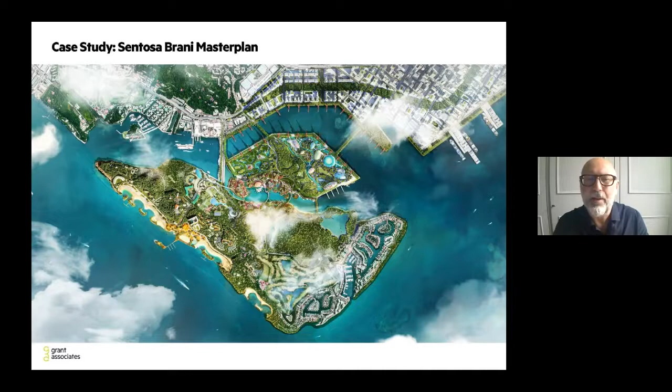Similarly, in Singapore, a few years ago, we worked on the Sentosa Brani master plan, where as landscape architects we led the project looking at how do we replan the 600 hectares of prime Singapore estate, the old port area, and Sentosa, the main leisure environment. Lots of themes about greening and urban, coastal protection, all the sort of environmental stories that we're talking about was brought to bear on that.

And it was great to see how the team came together, with Arup, the engineering playing a particularly important part, working with ecologists, working with economists, working with people who are specialists in the various aspects of the economy of the project.

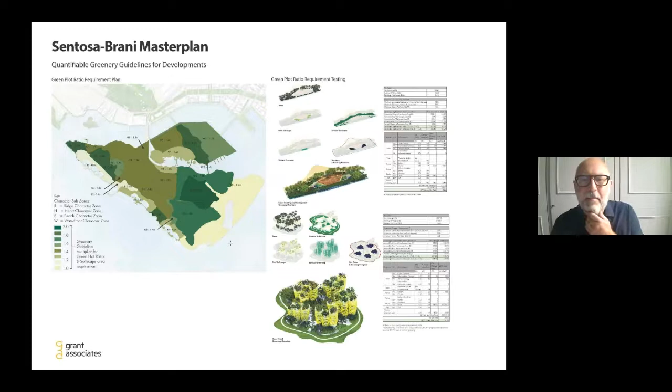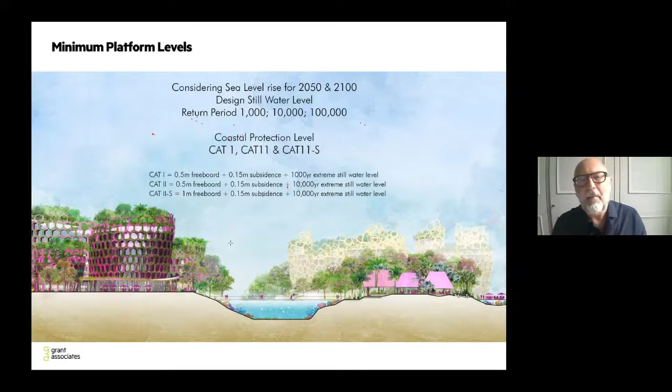But ultimately, it made us respond to some of these big environmental challenges in terms of how do these sensitive areas respond to sea level rise predicted over the next 50, 100 years. How do we retune the perimeters of these extraordinary places to be more resilient to those sort of changes? How do we recapture and restore coral reefs, seagrass, birds, beaches, all these aspects that are so common to challenges around Asia?

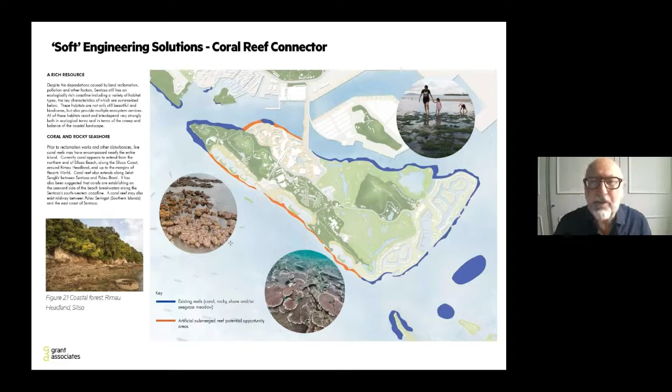It makes you think differently about the systems - understanding the systems we're involved with, the relationships, the circular economy, all those slightly abstract aspects really come into focus when you start to think about these new land use planning challenges, these new economic challenges. How does that work with the built environment and what we do?

At a smaller level in Singapore, there's the rooftop farm on Funan Mall, which is a great little example of a micro system that sat right in the heart of Singapore, in the busiest part of the city.

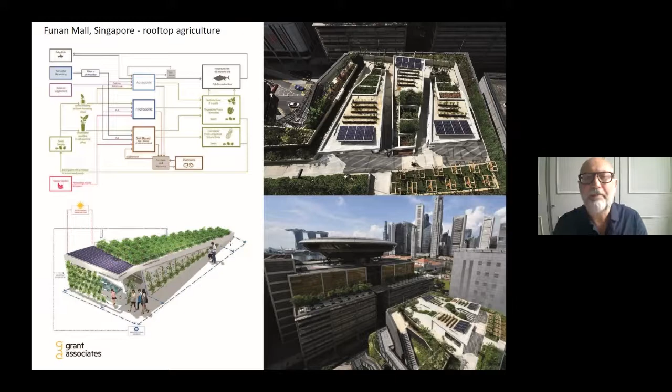As designers, we can be influential in different ways. This was a garden we did at Chelsea Flower Show in 2020, representing the ecologies of Guangzhou - a small garden, 20 meters by 10 meters, representing the environmental systems the Guangzhou government are trying to implement: the water networks, the lungs with the trees, and the kidneys with the water systems. We can showcase that to a very large number of people - Chelsea Flower Show was seen by millions, whether live or through broadcast. So we can influence people in different ways.

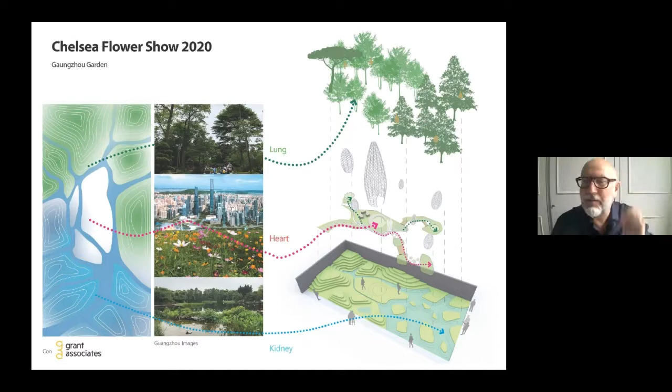So biodiversity is brought right into the heart of the city, hopefully incredibly influential, creating a much more intimate relationship between people and biodiversity, which I think is a fundamental part of any approach to climate and built development going forward. So I'll close there. Thank you very much.

Thanks very much, Andrew. It's really interesting that you played into some of the themes from last week - Dr. Hussain in particular was talking about how we have to consider ourselves as part of the great scheme of nature and not treat nature as a resource. I'm sure there'll be plenty of questions at the end.

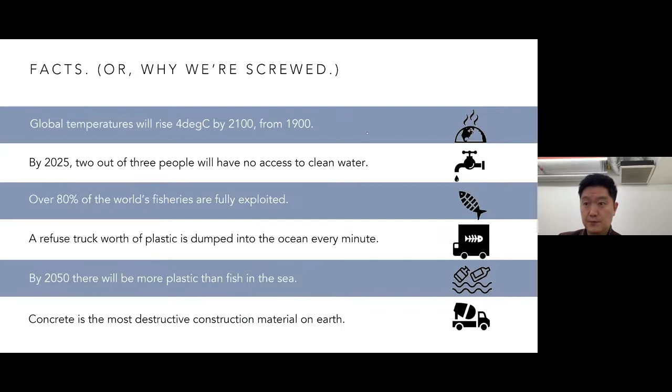To be honest, I think there are many goals within that architects do not have the agency to influence or control. For instance, gender equality - we might have more balanced workspaces, but the truth is we're not going to do too much yet in terms of solving, say, the hunger issue, the gender issue, or maybe even good jobs and economic growth, because we are, after all, guardians of the built environment.

We'll start off with the first, and that's education and integration. We look at modes of writing project briefs, for instance, writing project guides before the project even begins, and basically talking to the developer to set some of these sustainability goals. This could include forced or coerced modes of integration, including BIM integrated models that become part of the deliverable requirements for the project.

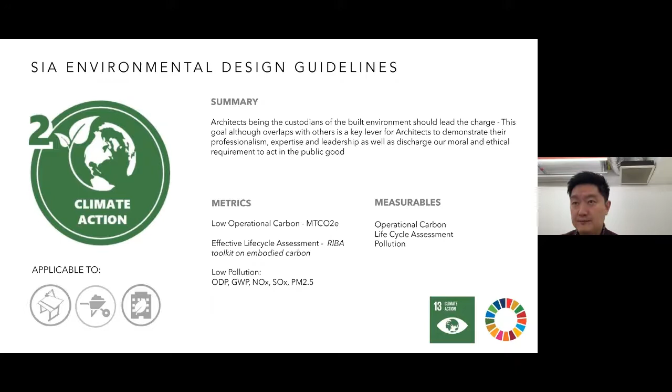So how do we set forth some of these goals? That could be in the example of a master planning type of project, indicating the required water savings, indicating the required environmental impact assessments, and limiting the damage to the existing ecosystems. Next slide.

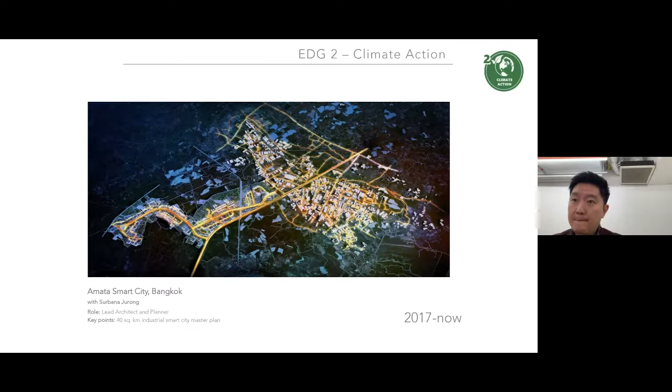And when we're actually talking about designing the building forms, they would of course need to maintain certain aspect ratios. They would need to incorporate as many renewables and clean energy tools as you possibly can. And these could be also targeting towards a preset energy requirement or an energy savings requirement that you set for a particular precinct. Next slide.

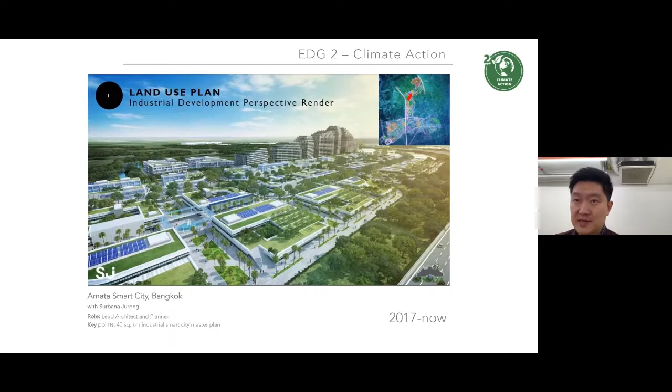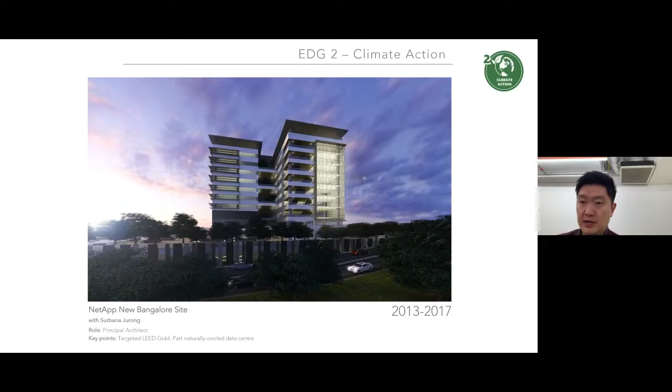Here's an example of a project in Bangalore, India, which actually has a cooler temperature than most of the rest of India. So it makes use of the ambient temperature of about 23 to 24 degrees Celsius on a good day, using that to cool the data center as opposed to using electrical cooling.

The next EDG would be on natural capital, basically preserving as much nature as possible. Andrew's covered pretty much all of that already, but effectively the metrics could include biodiversity indices, depending on where you are and which types of biodiversity are specific to your climate and context. A green plot ratio, or GNPR, looks at how much green you're actually replacing and how you carry that green, for example in vertical greens. The measurables could include leaf area index, landscape replacement, and how many species of biodiversity have been reintroduced as a result of the building.

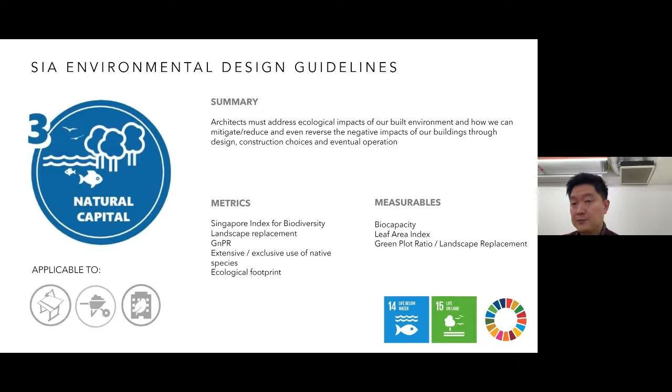Resource management—I'll spend a bit more time on this because there's an increasing shift now towards the discussion of embodied carbon and what we're going to do with waste material. Some of the metrics could include, for example, a percentage replacement of energy with renewable energy, as well as materials that have previously been recycled or are recyclable downstream at the end of their life cycle.

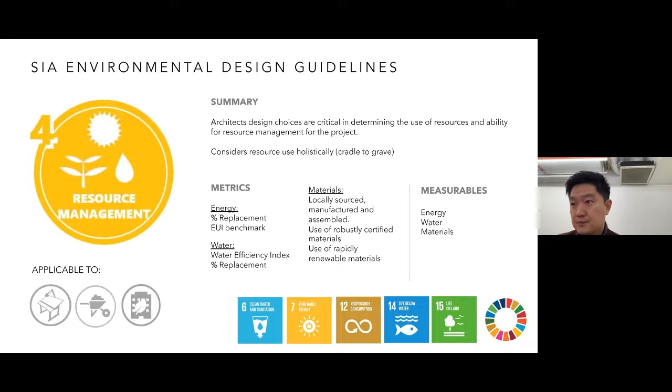So there's an example of a project that makes use of recycled materials, although it looks fairly constructed out of virgin material. This is a project that makes use of 1.5 million water bottles that has had its PET recycled into building blocks.

These blocks constitute the facade bricks as well as the interior lighting bricks, and you can see how they interlock in one of the images.

Each of these bricks is about the size of a small jerry can, and basically they can interlock and tessellate, therefore trapping air for insulation. Where you find any leaks or potential areas of leakage, you could also seal that up with resin.

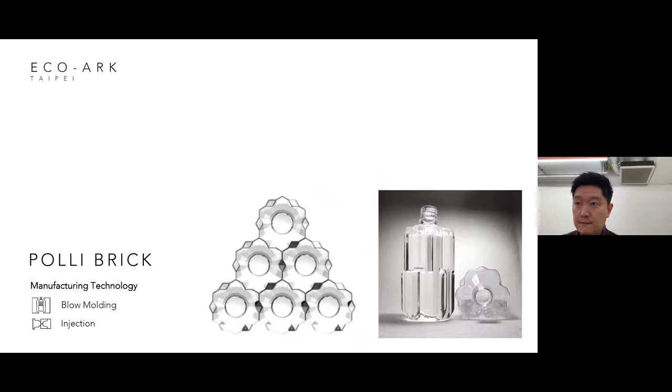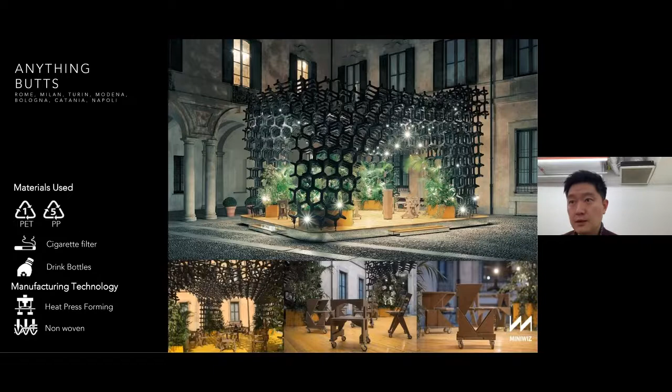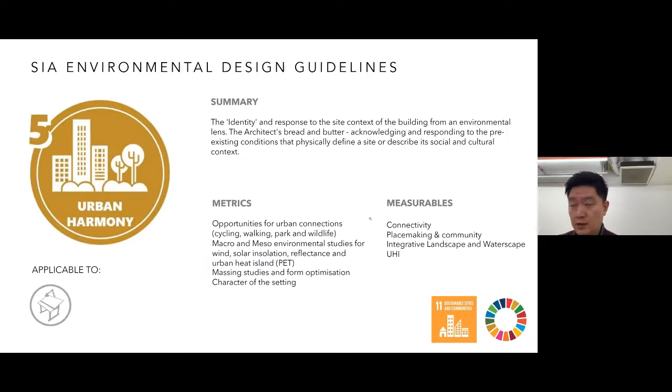An example from way early on in my career, a public housing building. It looks not so harmonious yet, but at this point in time the entire landscape has basically densified, and this becomes part of the urban tapestry of a public housing zone in Singapore, introducing breathing lungs within the building through the voids, and opportunities for chance encounters through connections at regular intervals within the building. Just a bit of context, we don't talk to our neighbors in Singapore. We go home to our little pigeonholes, and with any luck we'll be talking to them through Teams or Zoom.

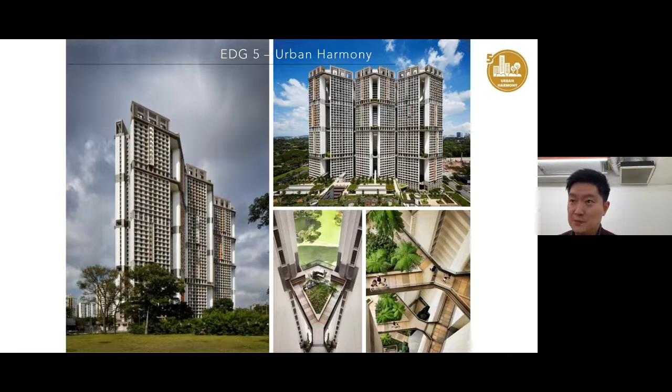Health and well-being. Here's where we adopt the principles of biophilia, of comfort, of safety, and of generally creating pleasant environments, designing gates and fairly social environments while keeping security in hand. Some of the metrics could be PMV, the predicted mean vote of what could be thermally and visually comfortable, and what sort of aspects lead towards psychological wellness as a result of interacting with natural elements within or outside the building.

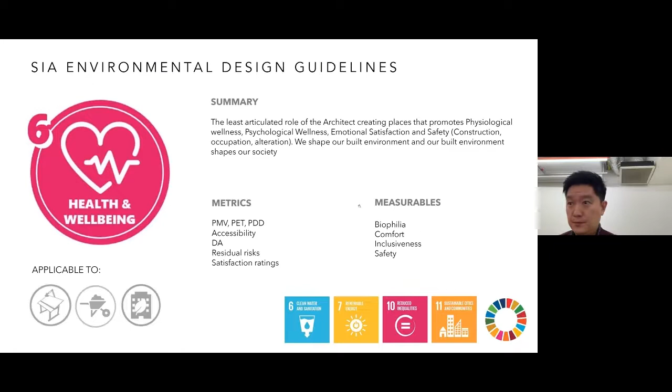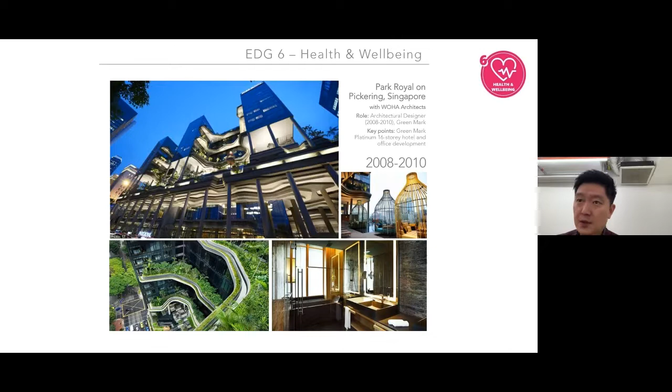Same project again with access to greens at high levels. We took some of these concepts into a hospital or healthcare type of environment where every ward has access to a visual green at least, and for patients who are mobile, they get physical access to some of these greens as well. While preserving the lush greenness of the landscape, we're also preserving, hopefully, the dignity of the patients, some of whom are in palliative care, meaning they're end-of-life patients with terminal diseases. But they too have access to these greens and spa treatments along the foreground of this image.

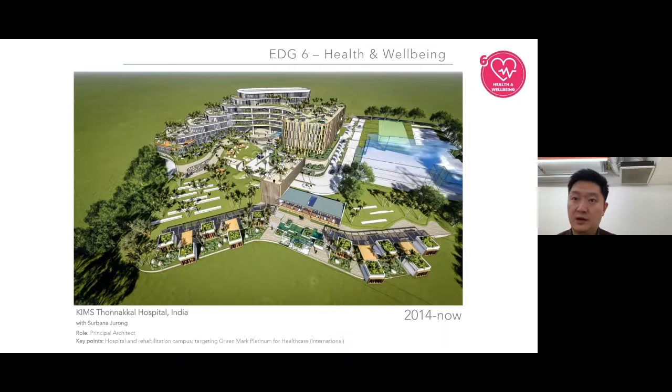And finally, designing for adaptability, where buildings can become structures that last for not just 30 years, as the real estate market would dictate in Singapore, or maybe Hong Kong or Asia generally, but looking at buildings that can last for hundreds of years, which is basically designing for future heritage.

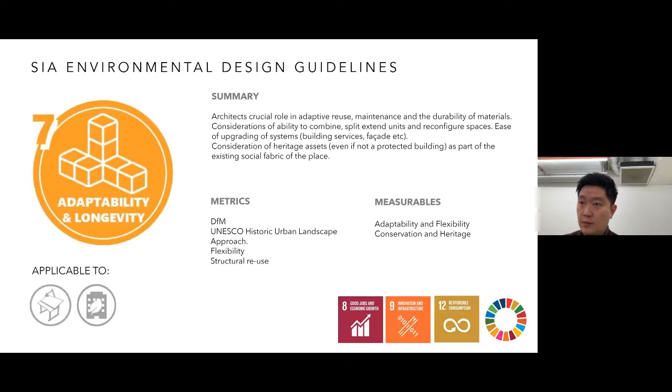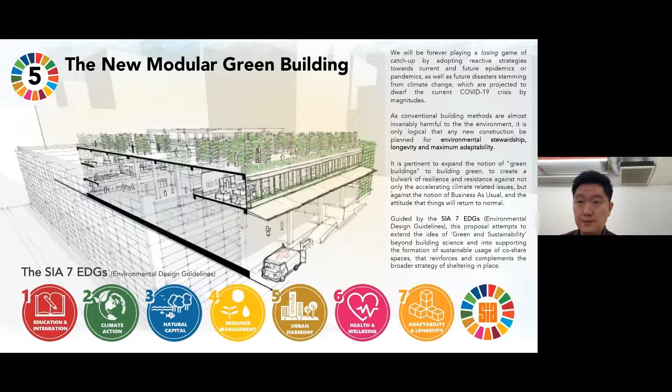Not only do we need to survive this whole climate crisis, we also need to thrive in its midst. And that brings me to the end of the presentation. Thank you so much.

Really interesting and inspiring talk, and how important it is that we have these guidelines and goals to create a measurable framework, and really great to see how materials can be reused or recycled creatively. I love that PV table actually, and some really fantastic projects too. Thank you very much, Han.

Our third speaker is Stefano Tranchi, Associate Principal and Regional Sustainability Lead for Woods Bagot in Hong Kong. Stefano is an architect with numerous years of professional experience in master planning, urban design, mixed use and civic architecture, and also interior design. He heads the Global Impact Group at Woods Bagot for the Asia region, leading the regional agenda on sustainability and wellness. His professional experience has enabled him to build a deep understanding of Asian places, the challenges faced by cities developing in this region, and the expectations of an ever-changing population of future users.

Trained in design thinking and creative collaboration techniques, he develops design from an initial understanding of a location, user behavior, community values, and unique site opportunities, with health and well-being central to his ethos. So welcome, Stefano, and over to you.

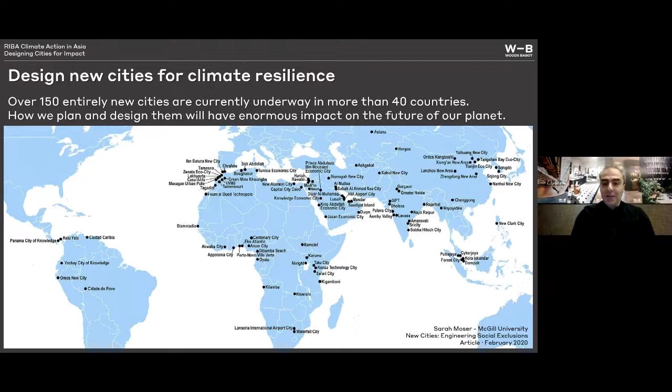And it's even more important when we think about cities in future tense. Consider there are over 150 entirely new cities currently underway in more than 40 countries, and that's staggering. We can barely manage the climate emissions of the cities that we have today - imagine adding all of these ones in the very near future. And when you layer population and overpopulation and the impact it has on climate change, we can see important shifts also in terms of where the future cities are going to be located.

In a few decades, we can progressively map the way people will transition from megacities currently located predominantly in first world countries or well-developed countries, to areas in the world that currently are described as more developing countries that are all the more impacted by the effect of climate change. So all of these things considered, we have to really focus on how we design cities for tomorrow, but also how we develop cities that we have today for a much better environmental and human perspective.

So when we were putting together this presentation, we were not going to provide you with a magic wand and change everything right away, but rather focus on a handful of characteristics and topics that can be implemented in our daily job in order to design and redesign cities for a better impact - from resiliency, to regeneration, to human-centric design and attention to resources. So starting with the first one: what does it mean designing climate resilient cities?

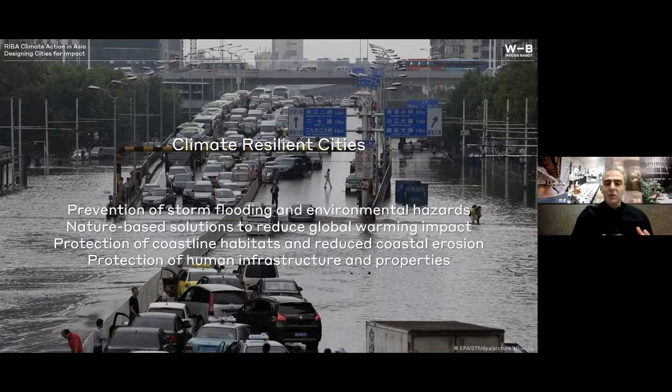So prevention from flooding, prevention from environmental hazards, using nature-based solutions to reduce the impact of global warming, and also protecting human properties as well as infrastructure from damage so that they can have a longer life.

For example, in China, we can see that the government, academics and professionals are already starting to implement changes of this sort. There is the Sponge Cities initiative, which Dr. Yu Kongjian initially defined, and it's basically an approach to use natural infrastructure across different urban environments to decrease the impact of environmental hazards, especially flooding and stormwater. It's already had a significant valuable impact in many cities in China and can become a very good blueprint to follow for many other cities affected by tropical storms.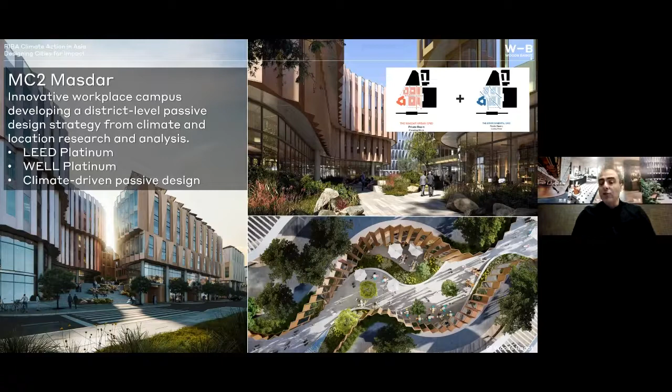In Woods Bagot, we designed this workplace campus called MC2 in a completely different climate in Abu Dhabi. Here, the impact of climate change is exactly reverse - it's the desert and increased temperature and lack of water that impacted us more. We needed to find a solution to create, despite the location and the climate, environments for people to enjoy and thrive, because only through that approach can we have successful business and successful environments and communities. So we designed this master plan interlaying an urban grid with what we call the climate grid, that favors the direction of the wind and provides shade and collects water into pools in order to create smaller gardens, augmenting the urban comfort, the outdoor comfort of all these spaces.

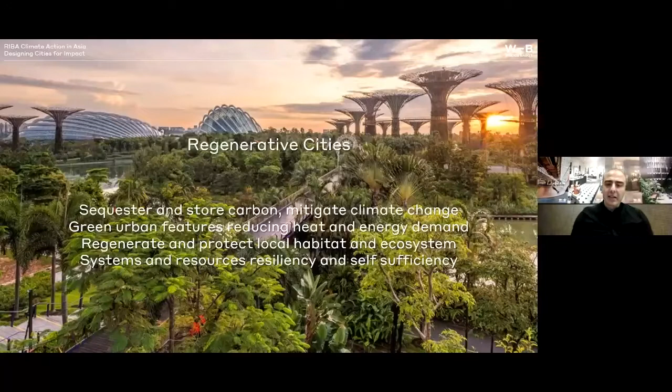When it comes to regenerative cities, we are thinking about infrastructure that can sequester and store carbon, mitigate climate change, create green urban infrastructure to reduce heat and energy demand, but also applicable to systems and resources resiliency, for example food and supply chain.

In terms of food, a good model that exists today is what Melbourne is putting together during the last couple of years. It's called a foodbowl city model. Basically, in a nutshell, it imagines a kilometer-zero organic food supply system surrounding the whole city and being able to supply for the majority of the food needs and requirements of the city itself. And right in the middle of the dense urban environment, having a number of smaller urban farms that can have impact on their own neighborhood and communities.

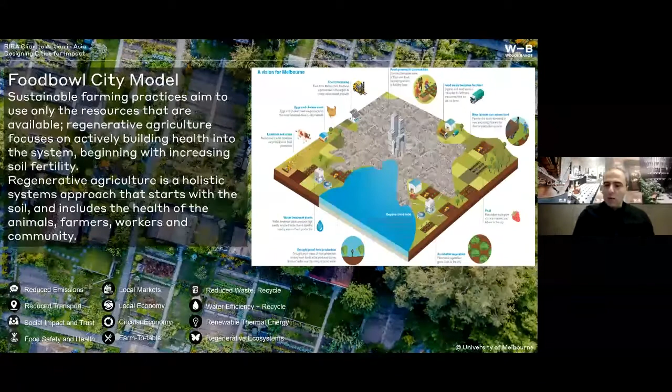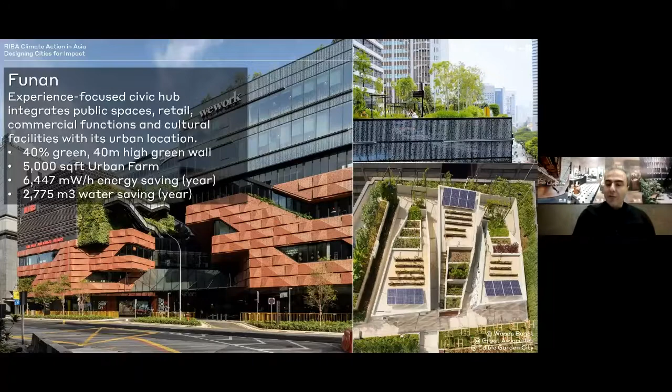When we designed Funan as lead architects a few years ago in collaboration with an amazing team of consultants, and Andrew was one of them, he designed the urban farm on top of the rooftop, as I mentioned before. The impact of very well crafted and designed small patches of green and functional green to the city is enormous. For example, one thing that I learned just recently - this urban farm, which is managed by Edible Garden City, partially employs people with disability. So imagine even the social impact, not just the food resilience that something like that can have in the middle of one of the densest cities in Asia.

Additionally, we want cities to be people-centric, in the sense of putting people first, having a design approach that has in mind societal and climate justice for all, implemented at city level, not just small projects - thinking about accessibility, safety, diversity, and education widespread across the whole city, and using buildings to do so.

And in New York, the High Line is probably one of the most amazing examples of how an approach to people-centric, regenerative cities can take form and shape, by renovating an existing piece of abandoned infrastructure crossing the whole city, and changing it into a place that all New Yorkers now want to go to in order to gather, meet friends and family, and also regenerating the local habitat and biodiversity that otherwise doesn't have that many possibilities to be regenerated.

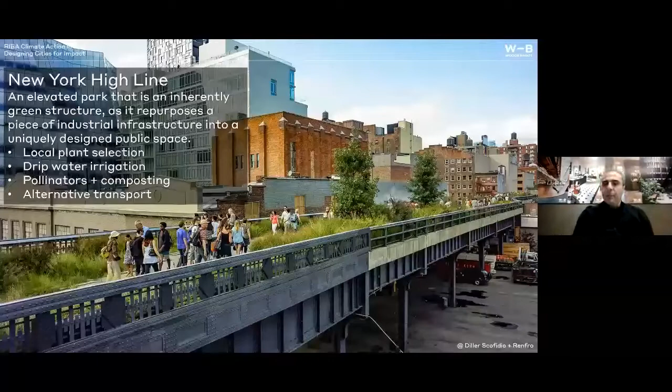Finally, when we talk about resourceful cities, we're talking about cities modeled around this idea of circular economy, at a city and regional level, with a very strong focus on resilience in terms of energy, water, and all sorts of resources. We know that our cities, especially in the West, are designed for cars, with urban sprawl and suburbia paying very little attention to maintaining and preserving its resources.

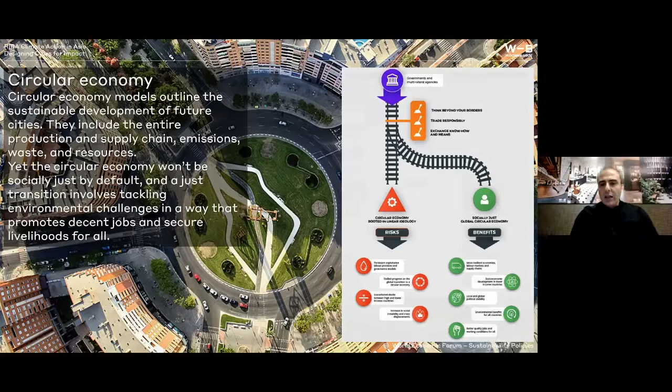When we designed this building, it was a design for a net zero tower in Hong Kong, part of the Advancing Net Zero competition that happened across the whole of Southeast Asia. So we wanted to embody the most amount of these principles.

First of all, this is a renovation of an existing tower. We didn't want to propose a new building because the saying goes that the most sustainable building is the one that never got built. In 2050, 80% of the buildings in Hong Kong have already been built, so we need to consider this existing building stock first. Then second, how do we densify it even further?

Buildings are over-designed in terms of structure, so we were thinking: can we add a piece on top of the building, a few more floors, in order to densify what we have and preserve the existing natural land around the city rather than compromising it further? Then we add ways to get to energy zero, as close as possible to carbon zero, and once at carbon zero, extend the life of the building as much as possible. We imagined this building through a number of adjustments in time, being able to reach almost 100 years of life, ending in 2080.

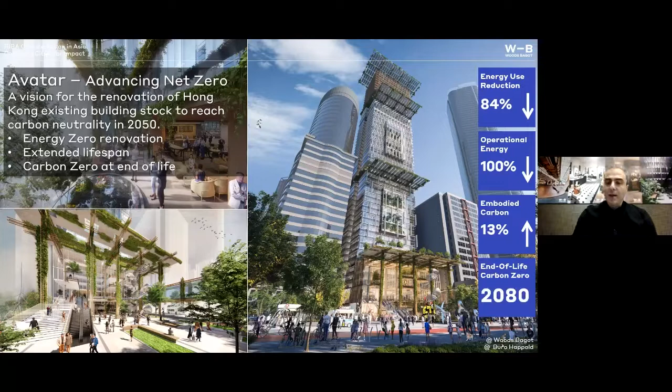I'll close here in a nutshell. I wanted to close with one point: in order to achieve change and face the challenge of climate change in our cities, as architects and professionals in this field, we absolutely need to find agencies, networks and platforms to collaborate honestly and openly among professionals, with governments, with construction companies and developers, in order to really achieve the targets we have placed upon ourselves.